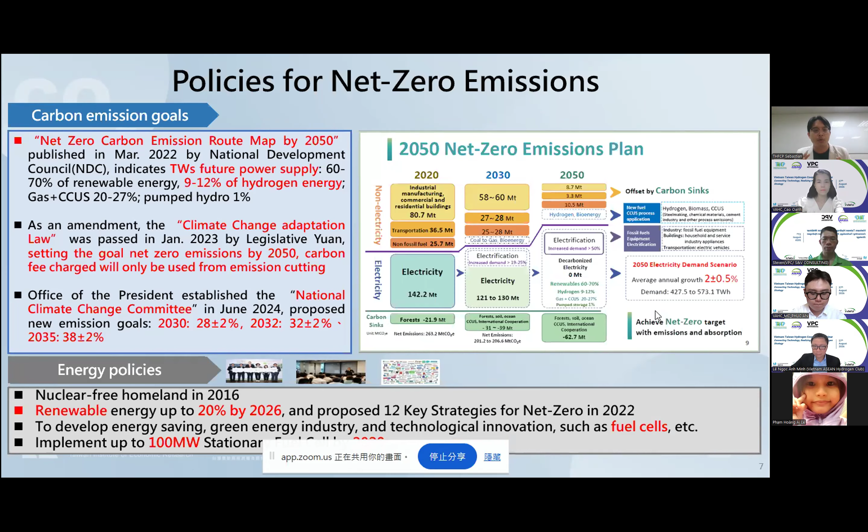I'll skip this part. Okay, so let's talk a bit more about the net zero policy and the hydrogen policy in Taiwan. Everything can trace back to 2022, when the National Development Council designed a net zero carbon emission roadmap by 2050. Based on this roadmap, we designed 12 key strategies, and back then in 2022, hydrogen was listed as one of them.

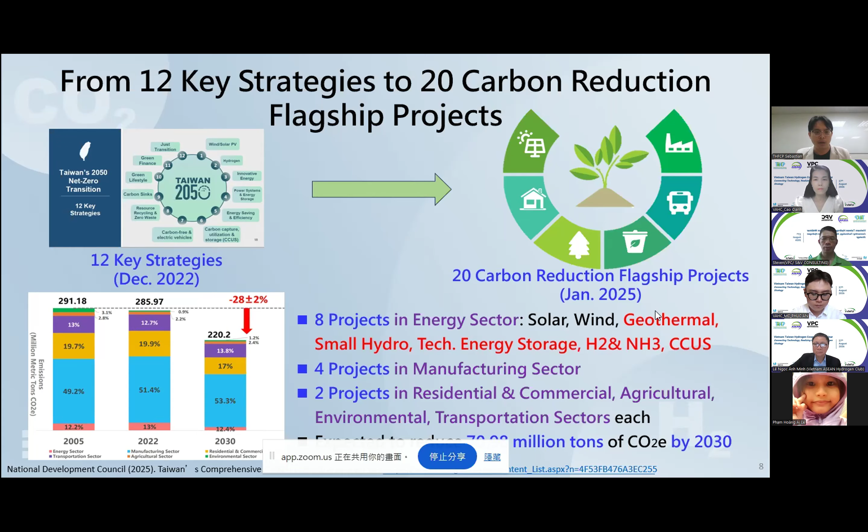Since we have had a shift in president's candidacy, our current President Lai has promoted the 20 carbon reduction flagship projects. Among them, 8 projects go to the energy sector, and again, hydrogen and ammonia, as well as CCUS, are included.

This is the big map of Taiwan's hydrogen policies. As I mentioned, tracing back to 2022, there are 12 key strategies promoted by the National Development Council. Back then, they wanted to boost hydrogen energy supply from 91 megawatts in 2025 up to 891 megawatts by 2030, but this only refers to high blend gas used in fire power plants. So we're still working on it.

Our new policy for hydrogen is called the National Flagship Project, called the Hydrogen Including Ammonia Supply Chain. I'll give a more detailed introduction later.

This part includes using hydrogen or ammonia as an alternative fuel to support the industrial sector and the power sector in lowering their carbon emissions. Also, the government has designed a large amount of funding to support the implementation of stationary fuel cells, for either high power or large scale power consumers like AI data centers or semiconductor producers. So this is the policy part.

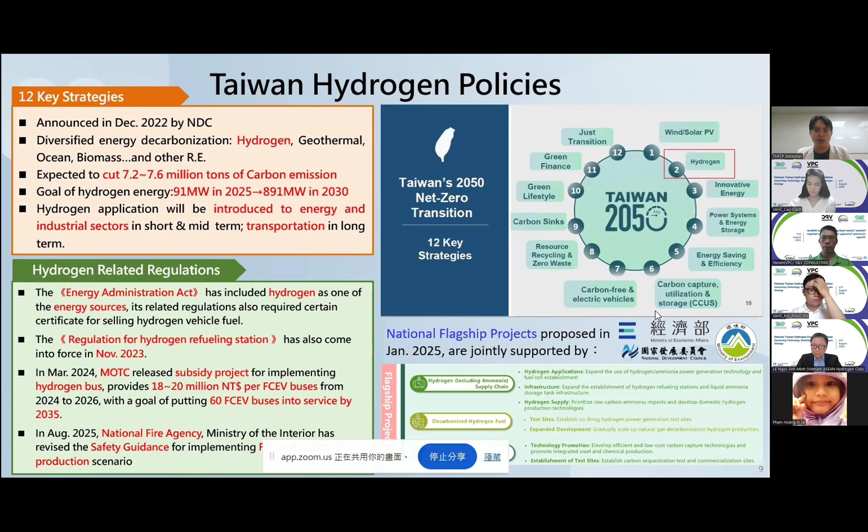Okay, so the next part will be the hydrogen and ammonia ecosystem in Taiwan. Start with production. For hydrogen, I believe Dr. Zhang will give a more thorough introduction of their experience and demonstration site in Nantou. They have combined the PEM electrolyzer with solar PV to electrolyze and generate green hydrogen, and the oxygen will be pumped into the fishing farm in Nantou. So it's a very unique case in Taiwan.

Another case is called Pilot Energy. They have a different focus on different types of technology. For hydrogen, they're using the PEM electrolyzer, and Pilot Energy is building their own alkaline water electrolyzer, with very high purity and considerable scale, if we deem it as a demonstration site.

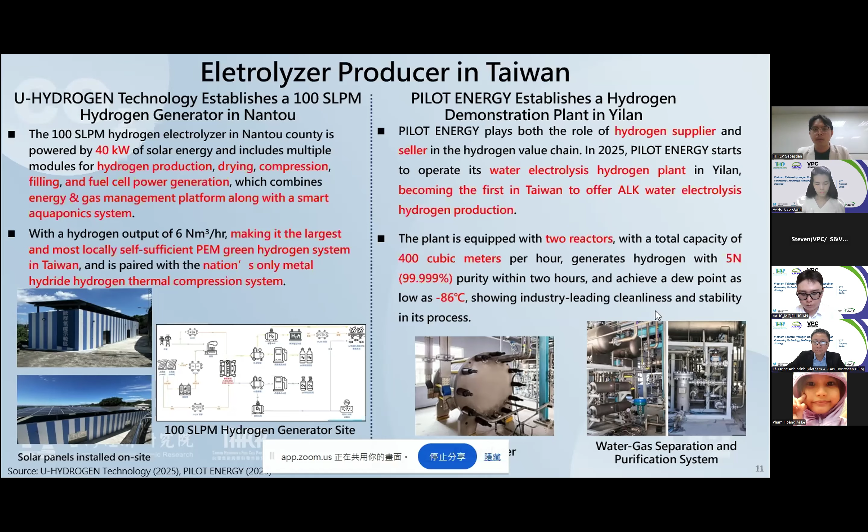So not just the production of hydrogen, our small and medium enterprises in Taiwan are also very good at innovating our technology. For example, there are four key component companies that have become key component suppliers to Bloom Energy in the U.S., including Kaori, who provides the hot box, and Porite, who provides the solid oxide fuel cell interconnect plates, and AcBel, who provides the electrical management system, and Plus Metal Tech, who provides the interconnect coating.

And we're not just a key component supplier, we can also be a supplier of electrolyzers and solid oxide fuel cells ourselves. For example, Delta, a very well-known publicly listed company, known worldwide for their energy saving and energy management in power electronics. About two years ago, Delta signed a contract with British Ceres Power to acquire their technology for producing solid oxide fuel cells and solid oxide electrolyzers. Their first megawatt scale electrolyzer and fuel cell lab has been built in Taiwan, and their commercial scale production line for fuel cells and electrolyzers is expected to come online by 2029.

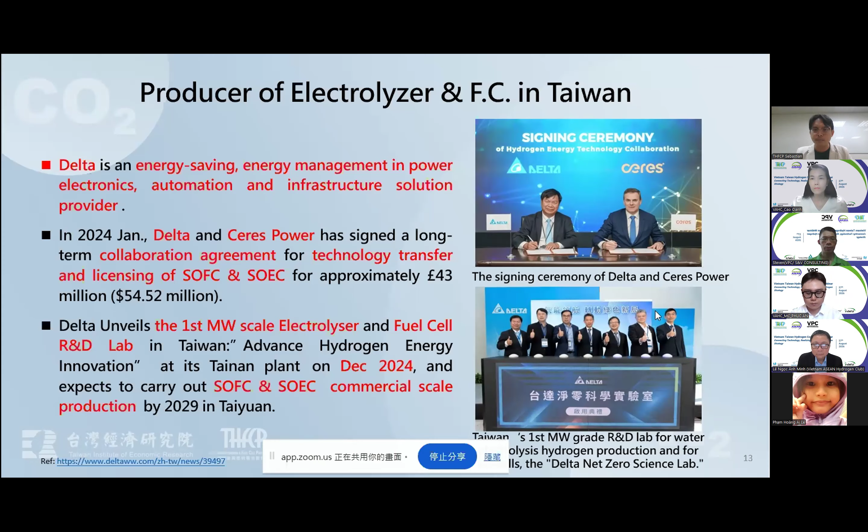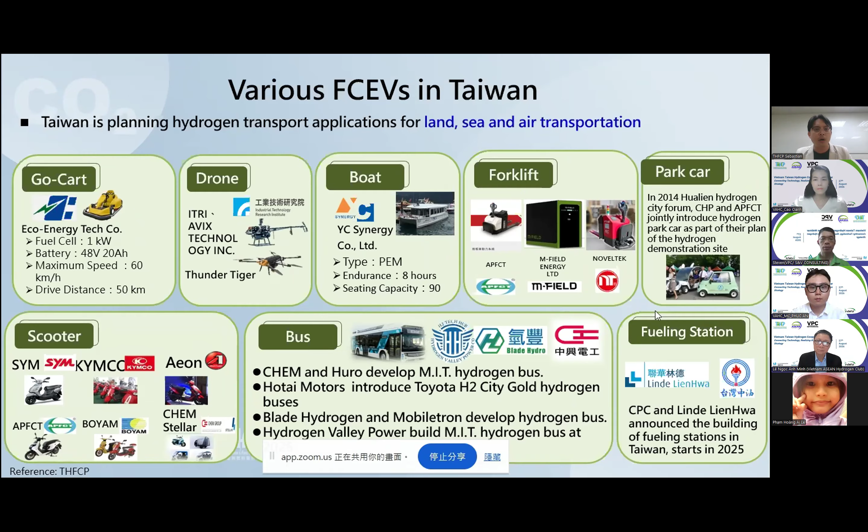I think I've introduced a lot about solid oxide fuel cells, since they seem to be a viable on-site power solution in the short term. But in the past, under the support of the Ministry of Economic Affairs and the National Development Council, Taiwan has developed different types of FCEVs, in the broad sense, including go-karts, drones, boats, forklifts, park cars, scooters, and buses. We're still developing, and our first made-in-Taiwan FCEV buses are expected to enter commercial scale production next year.

And we have also started our first refilling station, jointly built by CPC and Linde in Kaohsiung, which started just at the end of last year.

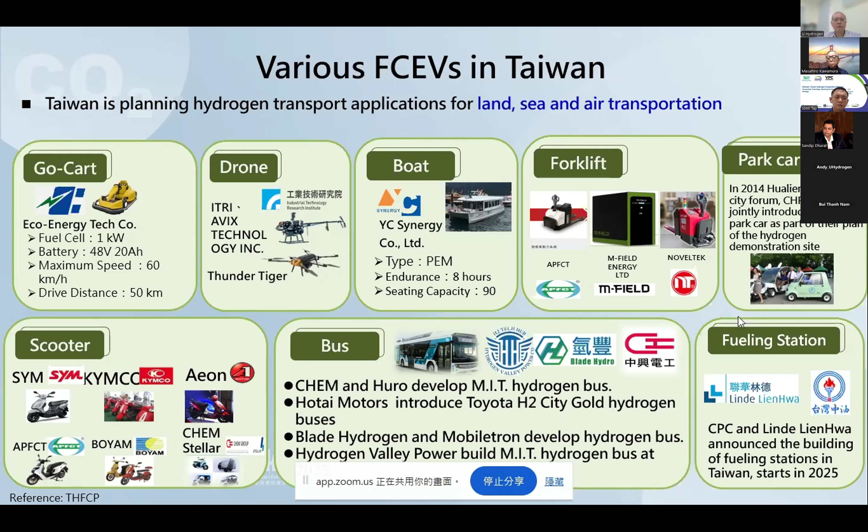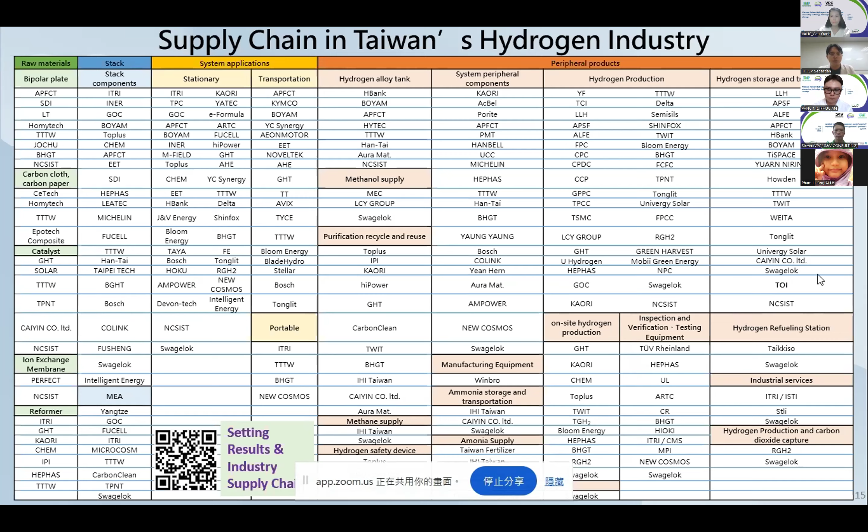If you're interested, feel free to visit the official website of the Taiwan Hydrogen and Fuel Cell Partnership. You can also scan this QR code on the slide, which will lead you directly to this industrial chain map.

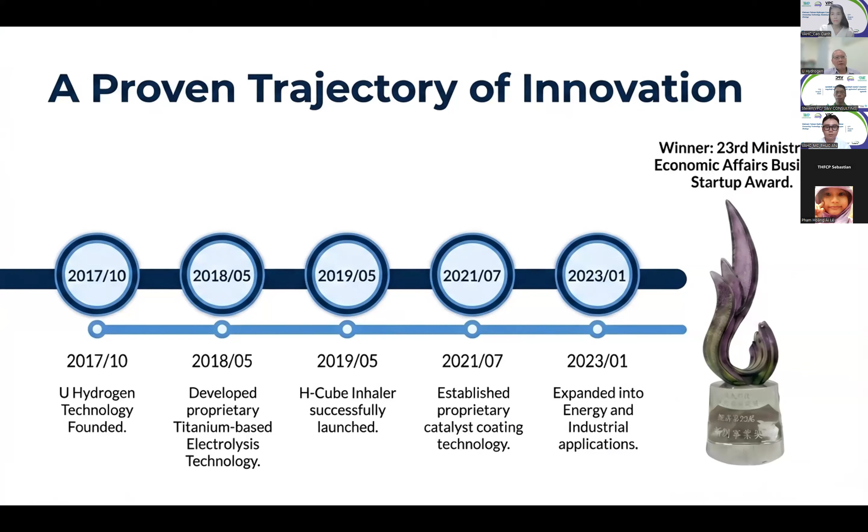Okay, so first, this is our company's milestone. U Hydrogen was founded in 2017. From the beginning, we focused on hydrogen production through PEM technology, like PEM water electrolysis. In 2018, we developed our titanium electrolyzer stack. In 2019, we launched related application products. And in 2021, we expanded upstream into catalyst coating technology. Today, U Hydrogen is among Taiwan's most integrated hydrogen technology companies.

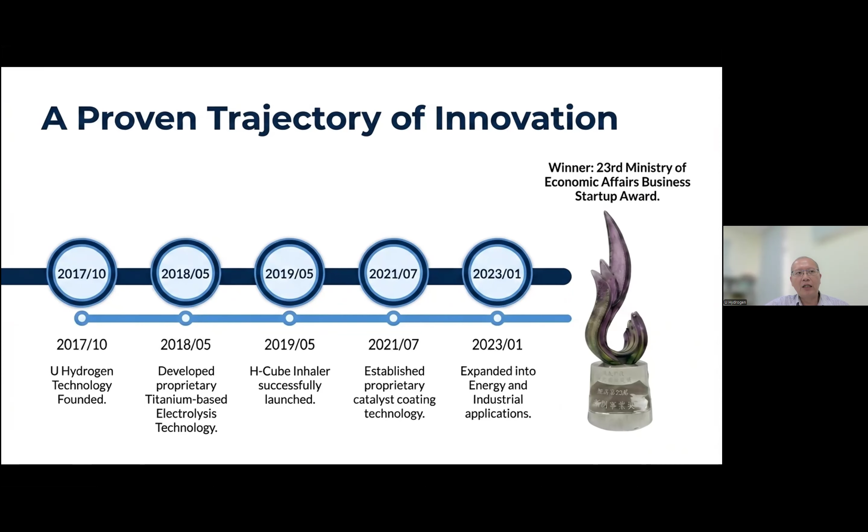In 2023, we invested heavily in industrial and energy applications. And in 2024, we received a Business Startup Award from Taiwan's Ministry of Economic Affairs.

Okay, so let me briefly explain PEM technology. PEM electrolysis is closely related to fuel cell technology, but the process works in the opposite direction. In a fuel cell, hydrogen reacts with oxygen from the air to generate electricity, and pure water is produced as a byproduct.

However, in PEM electrolysis, we apply direct current to purified water and separate it into hydrogen and oxygen. The underlying chemical principle is the same, but the direction of the reaction is opposite.

So PEM technology can produce very high purity hydrogen because it operates to separate hydrogen from water directly. The system can be more compact than conventional alkaline electrolyzers, while it can deliver higher current density. So we can make things more compact and with higher operation efficiency.

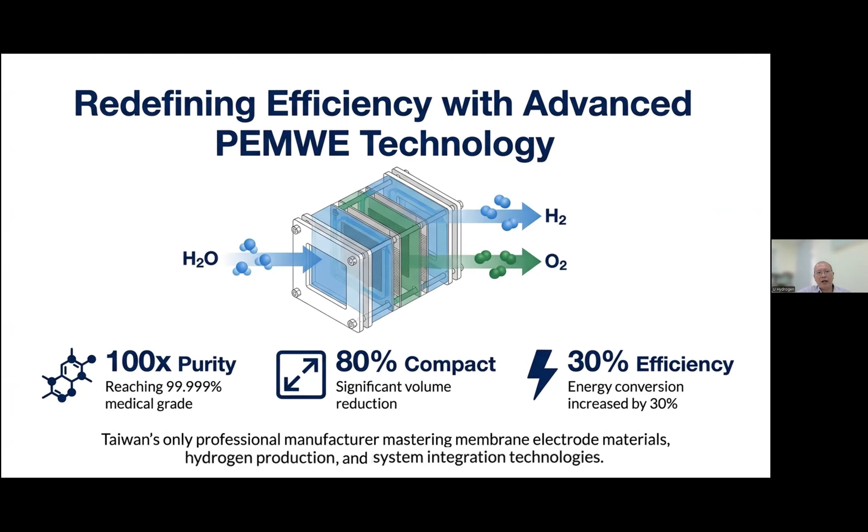So let's take a look at the pain point of the hydrogen supply chain. Here you can see hydrogen is produced from a centralized production line. Many factories use hydrogen as a raw material or protective gas, supplied from the centralized industrial gas producer. So the gas is then compressed for transportation. This might add a lot of costs and also a lot of carbon emissions.

And then it's reduced in pressure again on the customer side. So the supply chain creates a lot of extra costs, and the operation is very inefficient.

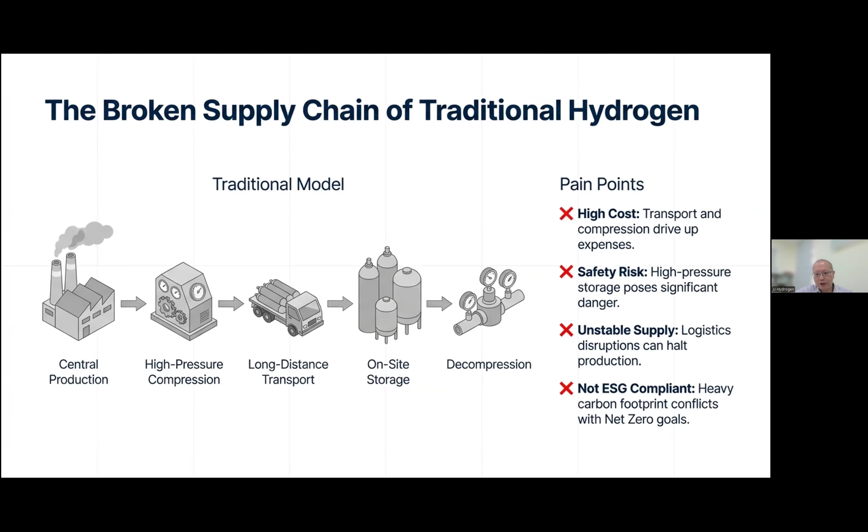At the appropriate pressure, it reduces the need for long-distance transportation, and it can provide enough pressure, like 10 bar, to avoid further safety concerns and regulation costs. As a result, the customer can lower their operation costs and also their carbon emissions.

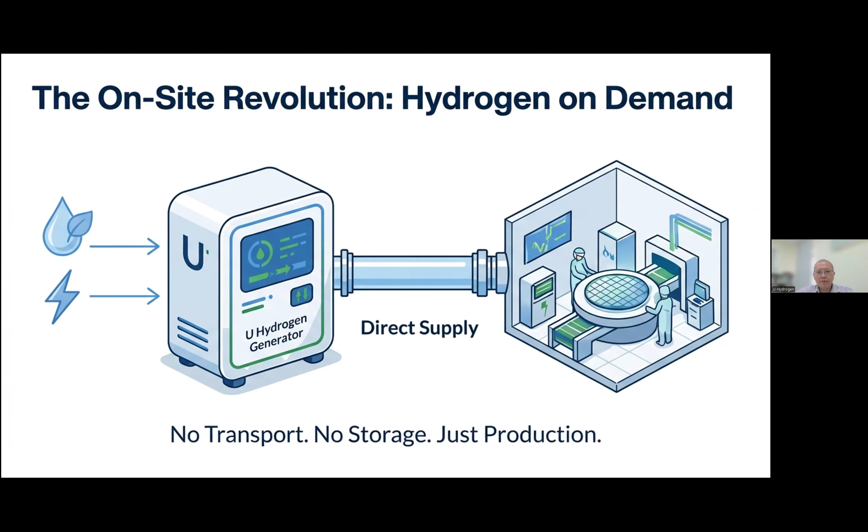So why is on-site generation the future? First, it can significantly reduce the overall cost of hydrogen supply by removing unnecessary transportation, compression, or handling. Moreover, it can improve safety because the customer doesn't need to store a large amount of hydrogen on site, which is flammable. So it can also reduce the safety risk.

At very high pressure, and the third point: on-site generation gives users great control over their hydrogen supply. So it can improve stability, reliability, and also, I think this is the most important, it can support ESG goals by reducing carbon emissions and enhancing the sustainability of an energy solution.

In addition to our hydrogen generation system, we also developed a larger range of testing platforms in-house. Since there are no local suppliers able to provide this kind of equipment, we had to build everything from the ground up. Now we are able to provide several different partners with our test platform. We currently support 4 or 5 universities, research institutes, or organizations in Taiwan who are doing hydrogen-related testing right now.

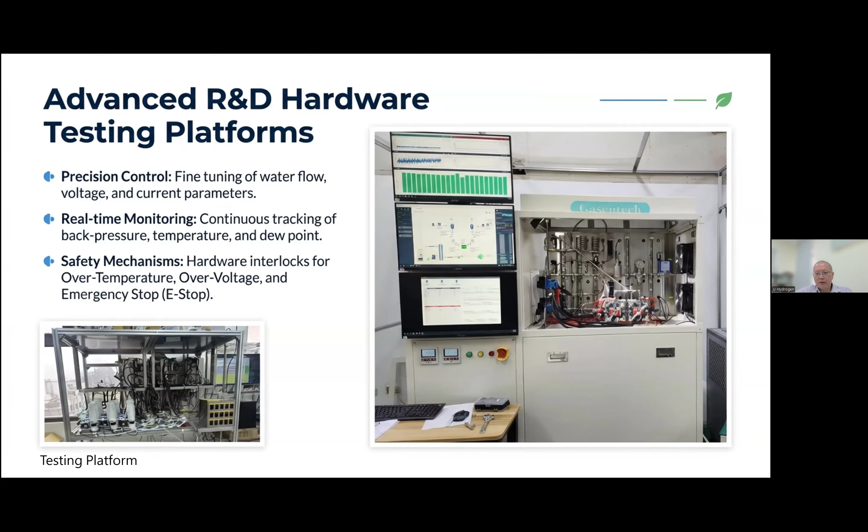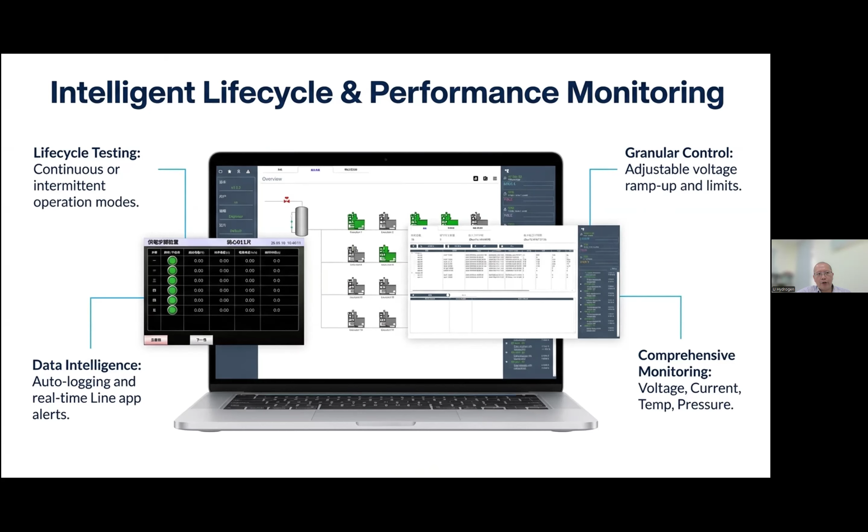Besides the hardware, we also developed an in-house software system, with which we can monitor our products and test platforms in real time. So if any issues occur, our system can provide earlier warning and allow remote intervention, which can help us prevent equipment problems and reduce operation and maintenance costs.

So here's our Nantou hydrogen demonstration project. This page shows the concept of how we integrate green energy with hydrogen production. This system integrates an 80 kilowatt solar array that provides power to our electrolyzer. This is presented as Taiwan's largest scale hydrogen production system, which can produce up to 100 liters per minute.

Okay, so let's take a close look at the system. You can see our hydrogen production system, which is 100 standard liters per minute. The system has a power range of approximately 30 kilowatts. It's made up of 4 electrolyzer stacks, each producing 25 liters per minute of hydrogen. Altogether, the system delivers a total production of 100 liters per minute, which is approximately equivalent to 6 cubic meters per hour.

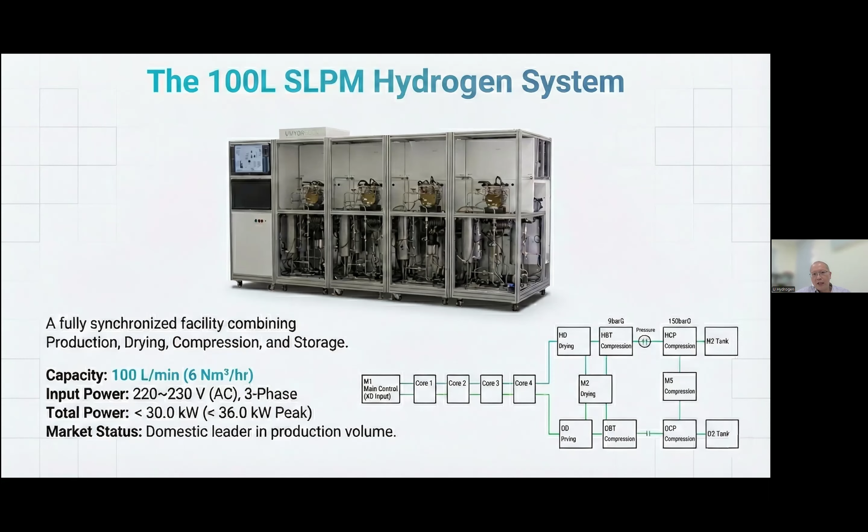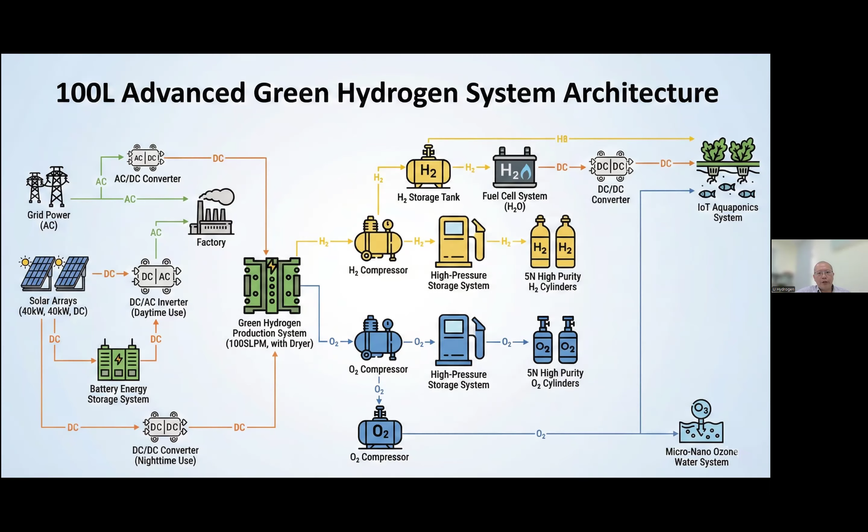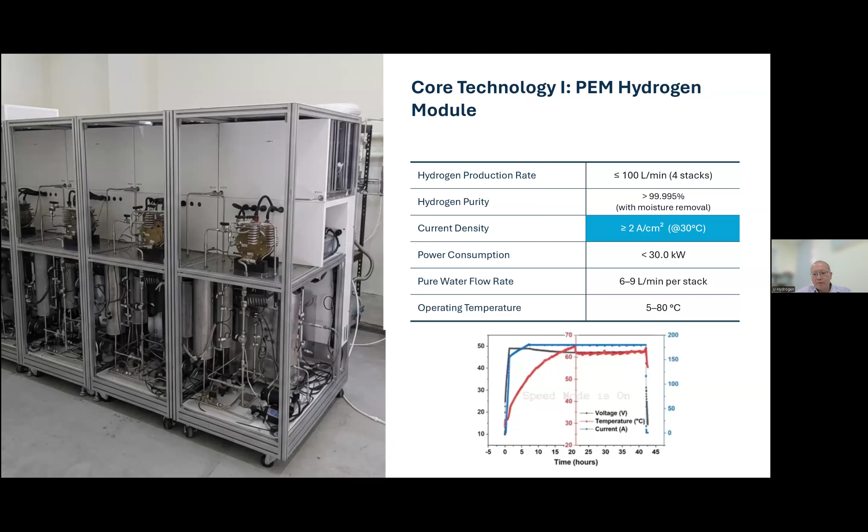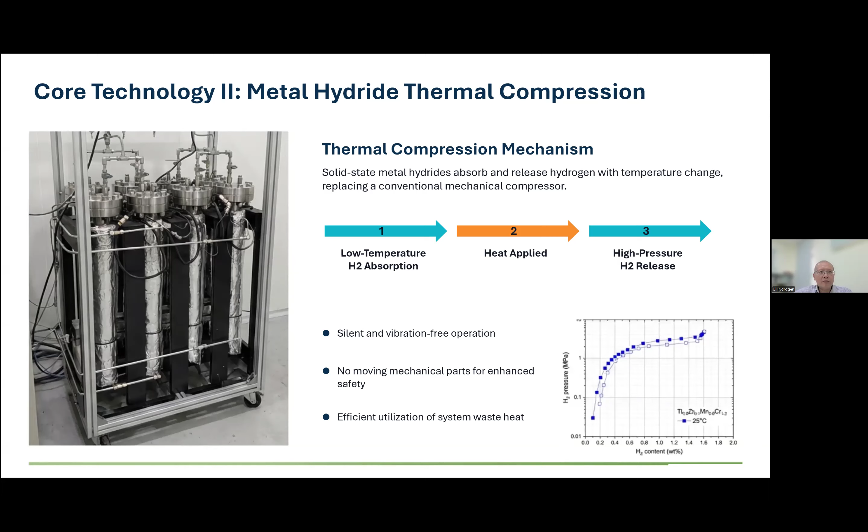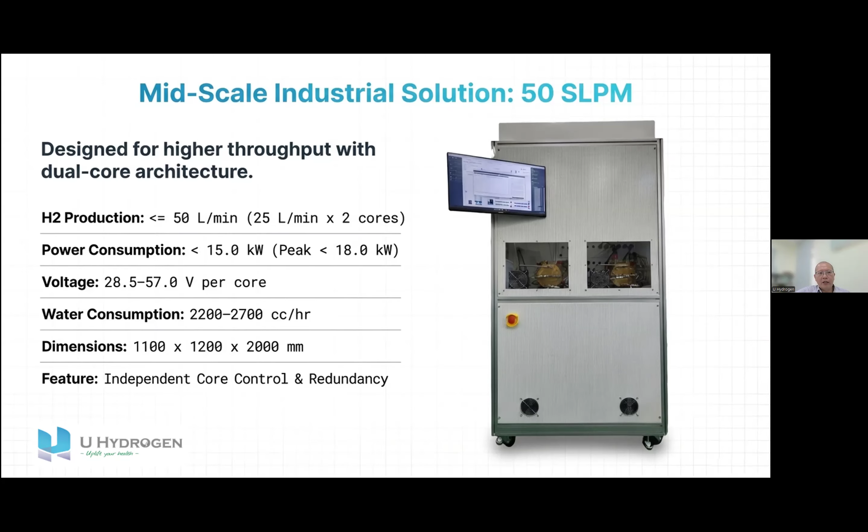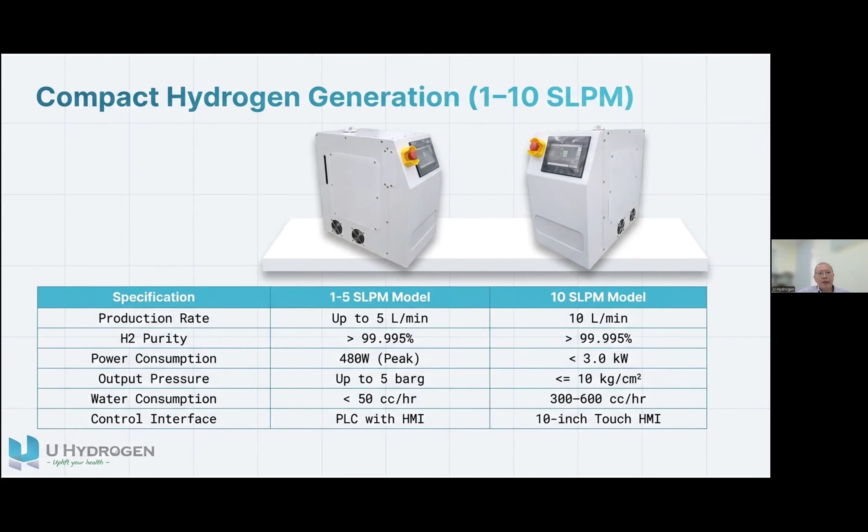Here are some compact hydrogen generators from 1 to 10 liters per minute. These systems are supplied for a wide range of custom applications because their compact size allows them to be integrated more easily into different types of equipment or operation environments. We can also customize these systems according to customer requirements, such as hydrogen purity, dew point, or other performance specifications.

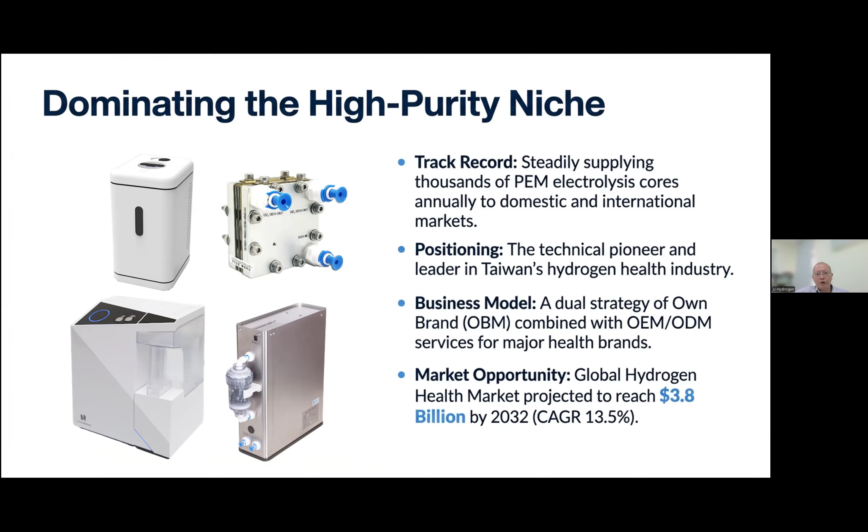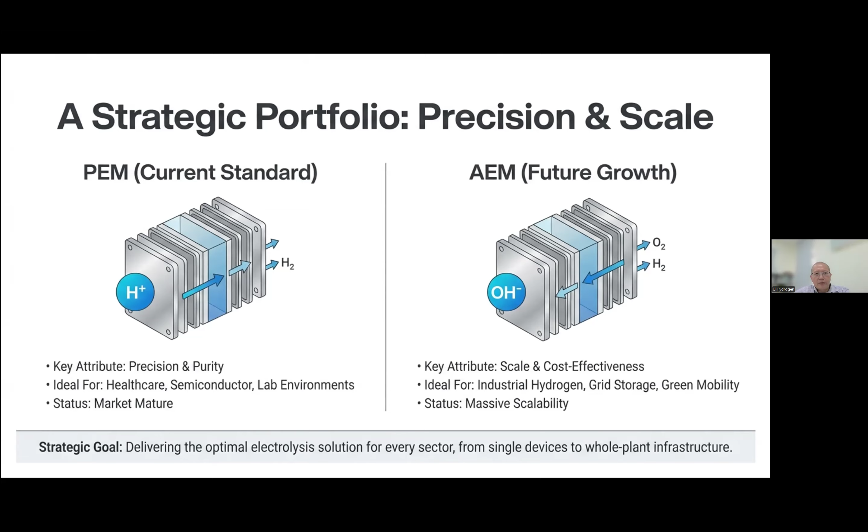This kind of electrolyzer is a little different from PEM because it offers some different advantages. However, it's still not mature yet, so worldwide a lot of research institutes have also invested heavily in this technology. On the next page, we will show you why this is very important for hydrogen production.

Let's take a look at the advantage of AEM compared to PEM. One of the biggest advantages is that AEM has the potential to reduce or avoid the use of precious metal, because in PEM we use a lot of catalysts made from precious metal. In this way, we can significantly lower the catalyst cost.

One important thing is that in PEM, they have an anode that requires a lot of material treatment to satisfy the PEM environment, and it's actually very costly. So compared to the PEM operation environment, AEM can significantly reduce the material treatment as well as reduce the catalyst.

So right now, many research institutes are interested in this AEM field.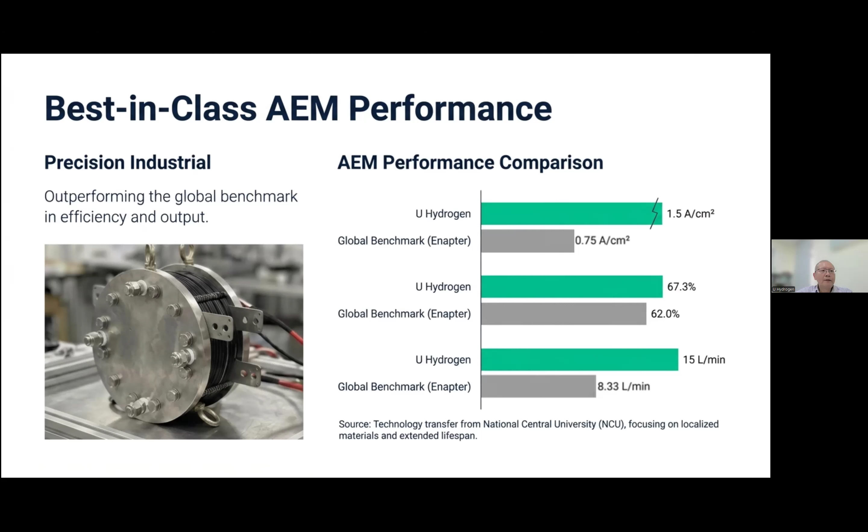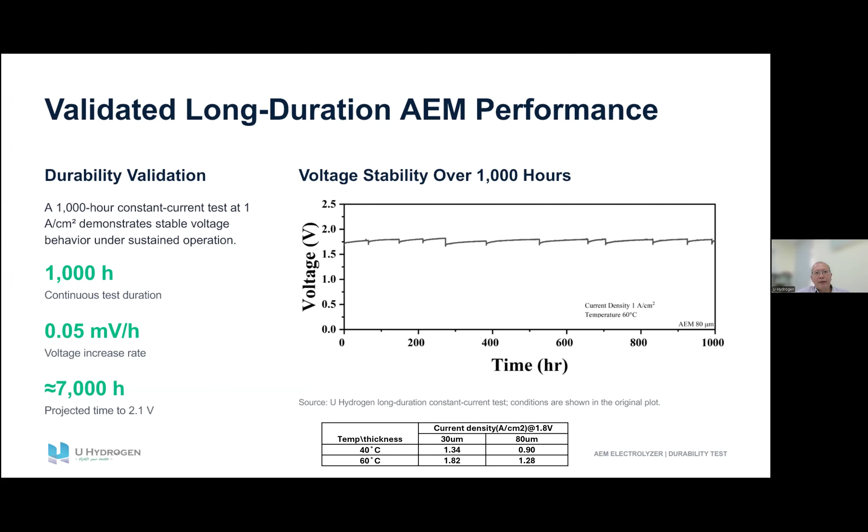Here shows you the AEM reliability and stability. This is the most challenging part of AEM development, because AEM currently suffers from long-term stability issues due to degradation. But in our preliminary 1,000 hour lifetime test, we operate at a voltage that remains almost below 1.8 volts, which is very stable.

Currently we estimate the degradation at about 0.05 millivolts per hour, which is very low. With this degradation rate, we estimate the lifespan can be more than 7,000 hours. This is still an early stage test, we have not yet used the best operation parameters, so there is still further room to improve the lifetime performance.

The chart below compares 30 micron and 80 micron membranes. Right now we are using 80 micron membranes for the long-term lifetime test. If we use 30 micron membranes, it can reach 1.82 amps per square centimeter, which indicates further performance can be improved.

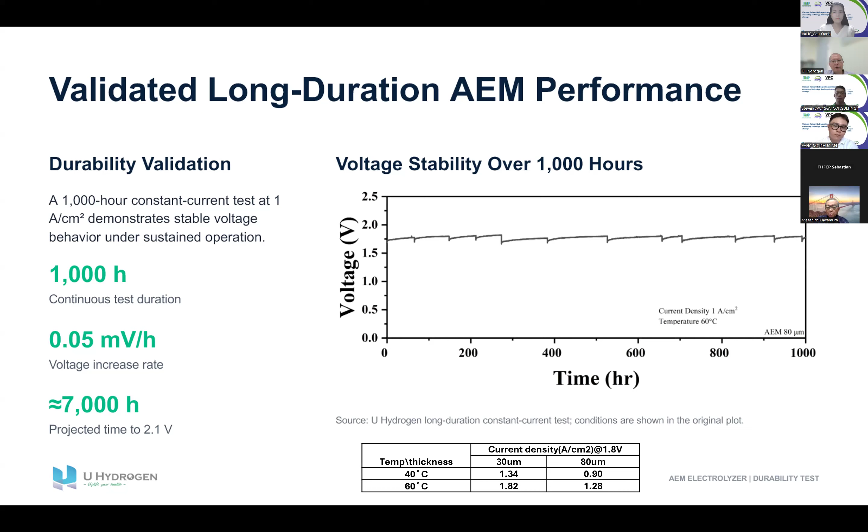Here I would like to show you another new development direction: electrochemical hydrogen compression and purification. This technology uses a PEM membrane to move hydrogen from the anode to the cathode. Because the membrane is selective, it can separate hydrogen from other gases, so it can achieve hydrogen purification. At the same time, by applying voltage, the system can also increase the hydrogen pressure. In this way, electrochemical hydrogen compression can achieve both hydrogen purification and compression in a single process.

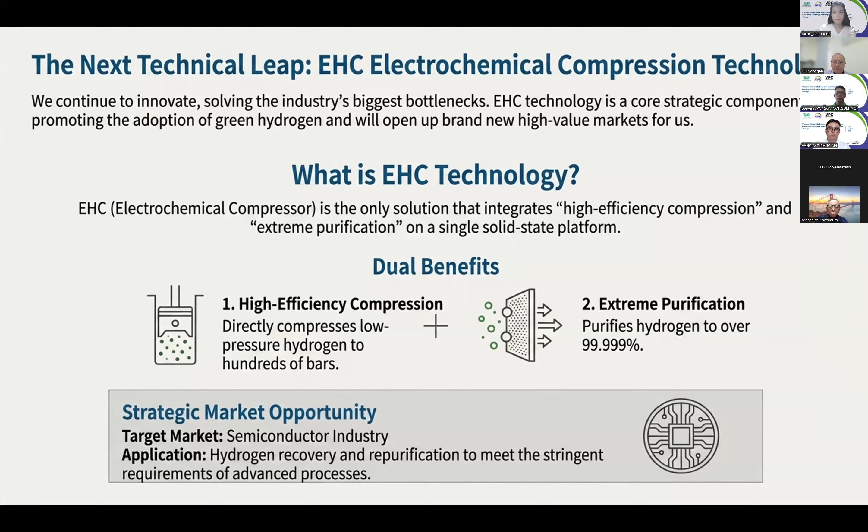This summarizes the core technology platforms: PEM, AEM, and also EHC hydrogen compression. By integrating these technologies, we can serve a wide range of applications, including semiconductor, healthcare and wellness, high purity hydrogen for laboratory use, or low carbon hydrogen for industrial use, and also energy storage applications.

In the future, our electrochemical hydrogen compression system may also enable hydrogen recovery and reuse. This can improve our overall energy efficiency and further reduce carbon emission.